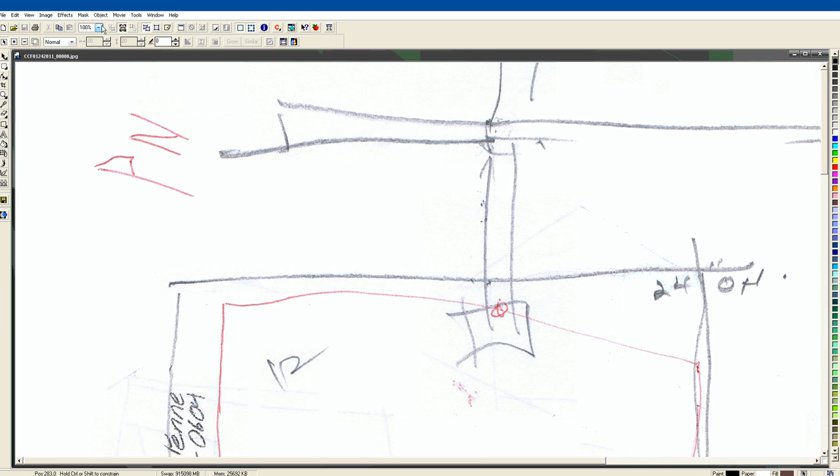I'm just going to use Corel Draw here to do this. Let's get up, we'll bring in the first scan here. There's a lot of scratch, hopefully you can see, you'll have to follow my mouse here as I talk. This is his basic drawing.

It's a rectangle. He's given me some sizes, he wants 58 feet that way and 28 and a half feet that way. This, not necessarily the front of the house, but over here is the road. It's in a large field. He has a really nice view going in this direction, if you can see my mouse.

On this house he's going to attach a deck, and the deck is going to wrap around. His front door is over here, his driveway will come in through here. He's going to put this squiggly line in here as a retaining wall, and then we're going to build him a shop over in this area here. This gives us our basic layout. The scratch is just stuff that we talked about as we were working through this drawing.

Okay, let's bring in another one. Let's go to fit. This is a scratch drawing just so that I knew what was going on. This is his basement, underneath the main floor of the house, so concrete.

He's going to walk out the back of it again into this large open field with the view, so he wants glass doors to walk out of. This BM is just a beam we're going to put right down the center. Floor joists are going to run from either side, and then we've just sort of done a little layout showing he'll probably have a bedroom over here and a bedroom over here.

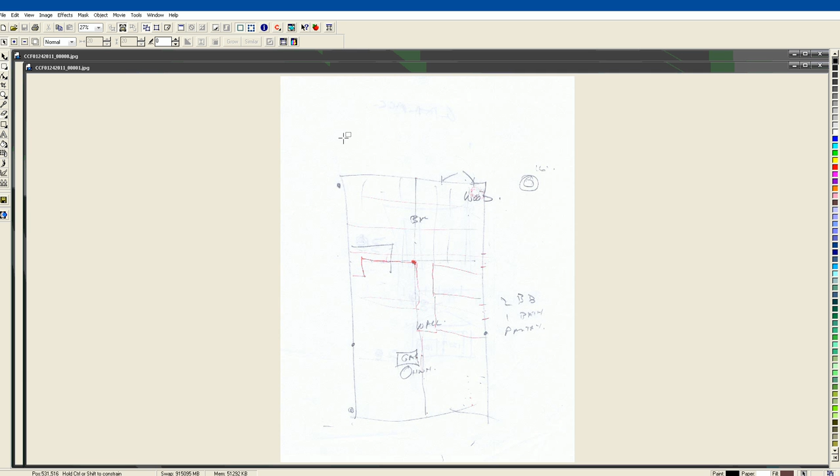Okay, we'll bring in another one. So you'll have these files, you can print them out, I use them all over the place. This one needs to be rotated a little bit. So image, where's rotate? Here's rotate, and I want to go counterclockwise.

So this is just a sketch sort of showing his elevations. His land is very sloped. So we talked about the road being at, well, the front of the house, the north end of the house. This would be the road, so there's a hill coming down onto the road.

And what he's worried about, his land slopes continuously down from the road. And he's worried about water running down across the road and then coming down into his basement. And so we're going to give him 10-foot high walls here, and he's going to backfill so he's got some slope going from 8 inches below the top of his concrete back to the road.

And then we're going to step the basement, so that he can walk out down at this level. Now we get to dictate on the plan how he's going to backfill all of this. As you can see, there's going to be lots of backfill. So this is just a sketch.

This was another way of getting a 9-foot high or a 10-foot high basement, was to use 8 feet of concrete and then build a wall on top. But he doesn't believe that he's going to be able to get slope from this point back to the road. So we're going to do this all in concrete, and that's beyond us in the BC Building Code.

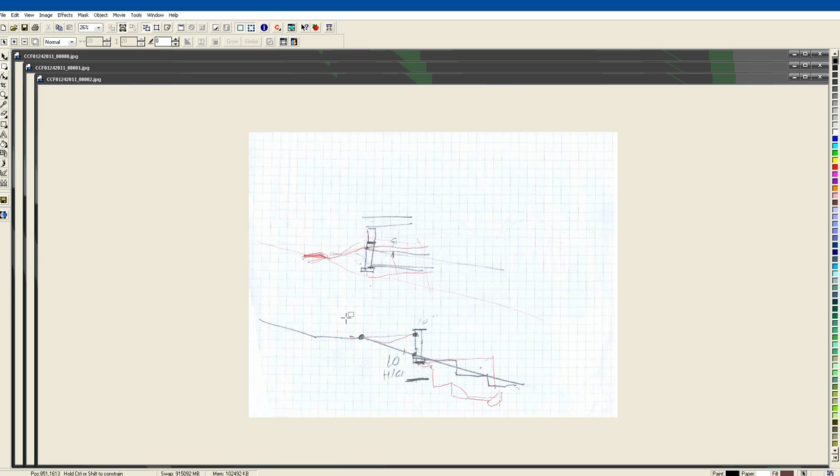What he's going to have to do is take our plans to an engineer and have this 10-foot high wall, with backfill up to 8 inches from the top of it, engineered. The engineer will tell him how thick that wall has to be, how much rebar it has to be, and so on. So we've already pretty much established that as we were talking.

Okay, so another drawing.

Again, this one needs to be rotated, but let's go ahead and do it. Rotate 90 degrees counterclockwise. Okay, this just basically shows the back of the house.

So here he's got his foundation. This squiggly line would be the ground. He wants lots of windows.

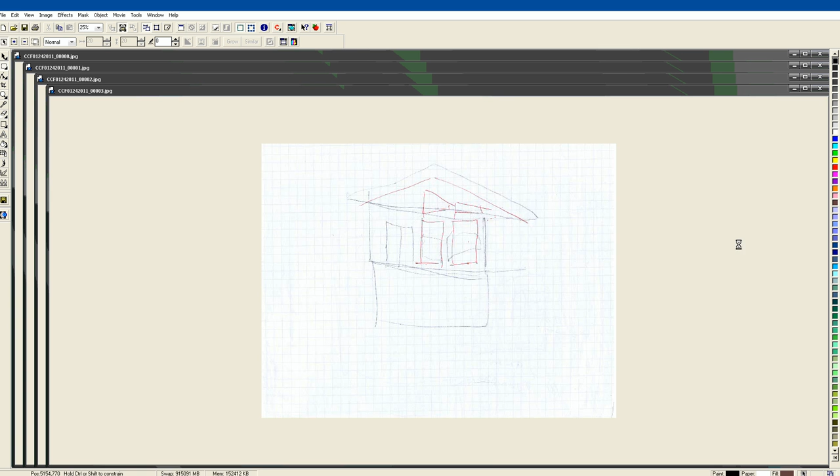He wants a ceiling in the back end of this house that matches the pitch of the roof so that he can get these rake windows up on top. And then here he wants a double door onto a deck. So that's all that was about, just to jog my memory what the back of the house wants to be.

So this one, okay, this is a squiggly layout. This would be his house. This would be the wraparound deck. Now we're going to build him a shop over here.

And we're going to put a breezeway, a roof, so that he can walk from his house, from that door, the side door, the front door if you will, over to his shop, and he won't have to shovel snow because it'll have a roof over it.

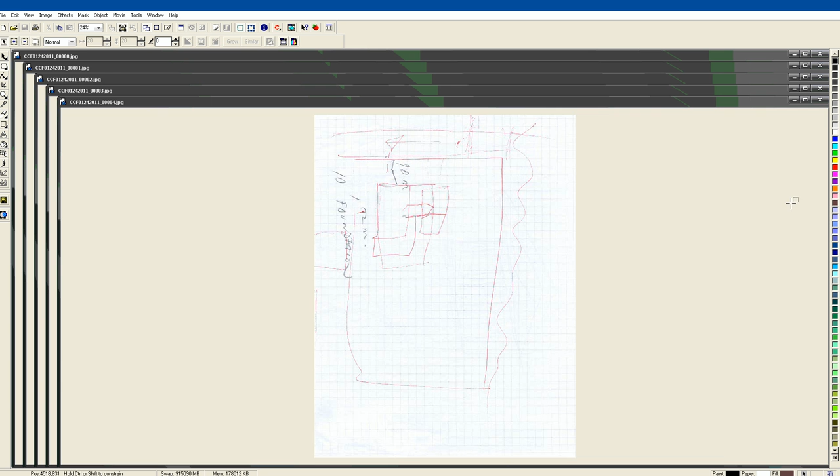Okay, this one, to fit. Again, needs to be rotated, but it's just another graphic for me. This would be his shop.

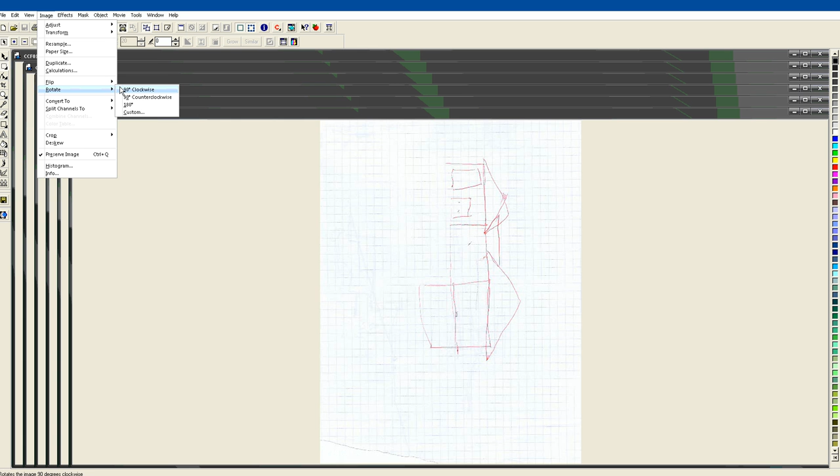Here, let's rotate this so it'll make it a little bit clearer for you. Rotate. Okay, so this would be his shop over in this direction. This would be his house. The roof of the house is going to cover this deck completely.

So there's some information off this drawing. It also shows that he wants a large garage door in this, and a small one. One's for his wife's car, and the other is to get his boat into this space. And again, the roof between the two.

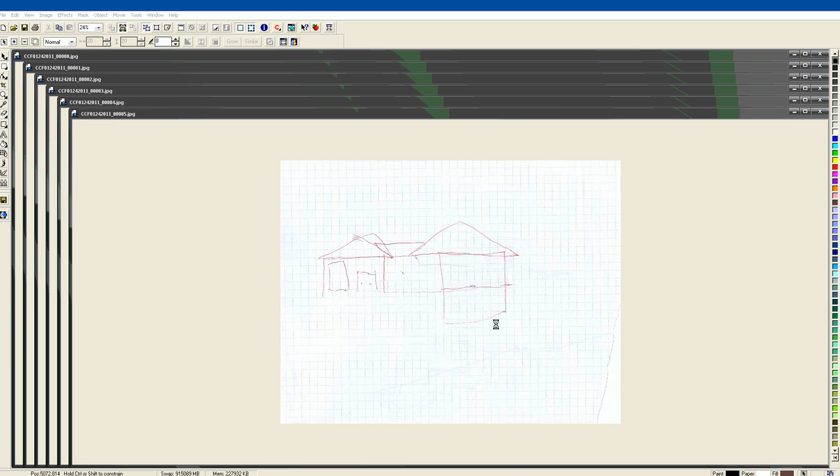Okay, so let's bring in the last one here to fit. I don't even remember what this is. Oh, this is the shop. Let's turn it around completely. To fit, I need to rotate it.

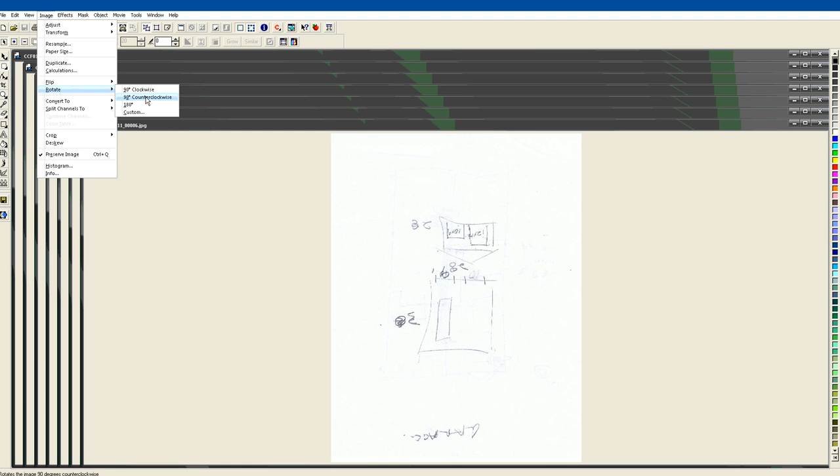Rotate. Well, let's do one of those and then do another one. Okay, so this is sort of the layout of the garage. It's going to be 30 feet long, 28 feet wide.

The door here is going to be 10 by 9 high, and this door is going to be 12 by 12. Okay, so there's some information that the roof will match the roof of the house, and of course there'll be a breezeway. So these can be printed out, they'll be a lot clearer for you when they're printed out.

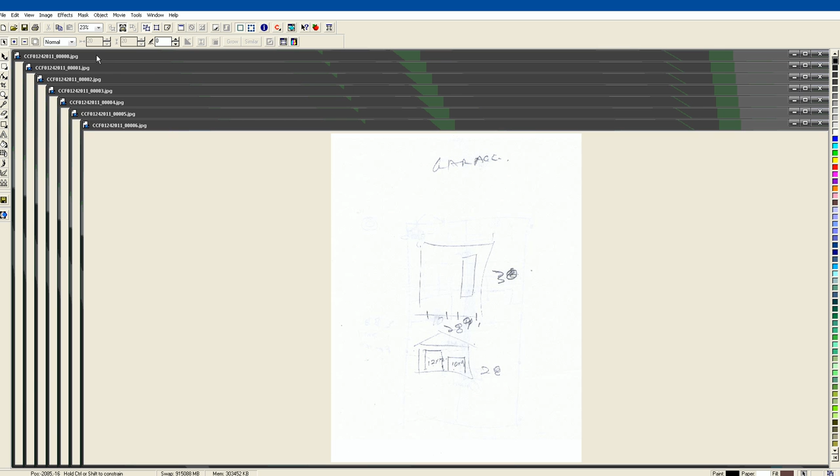But anyway, that's pretty much what we're going to work with here. If we go back to his floor plan that we're going to start with, let's go to 100% here so that we can scroll around.

Okay, so that's a lot clearer for you. This is what we're going to work off of. Okay, we get to play with it.

Okay, he doesn't know how wide this bedroom's supposed to be. He has a hallway. He has a main bathroom. We know that's going to be 5 feet because that's a tub, toilet, vanity.

This ensuite area needs to be fairly luxurious. You can see he's got a big 5 or 6 foot corner tub in there. He wants a walk-in closet, so that's going to take up a lot of room.

He has another little bedroom, bedroom number 2, okay, here. Then he's got this pantry set up, closet for this bedroom. He needs an office with a corner, double glass doors he wants in there.

Okay, this stair, we'll figure out his stairs. He wants the stairs 42 inches wide. That was very important. You can see this is his main door for coming in.

And he'll have steps that come up to this door, not very many, because he's going to backfill up to there, but then he's going to put in a retaining wall here, and he's just going to drop the elevation, his finished elevation, down steeply so that he can get windows underneath these windows downstairs.

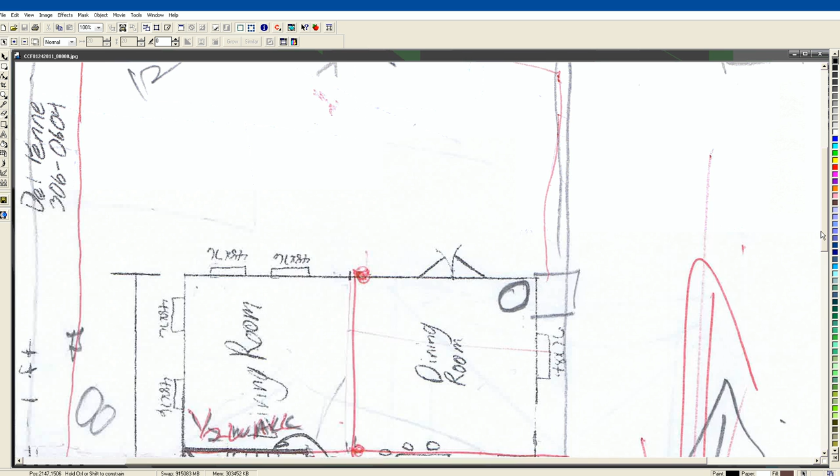Okay, here we've shown a good sized 12-foot deck that he wants out of here. We'll have to have a big post sitting here with a beam running across, and again rafters.

And this red line here sort of designates, okay, he's going to have posts all along here, so that this roof will extend all right over here, covering this whole area, not just the house, so that everything is under a roof.

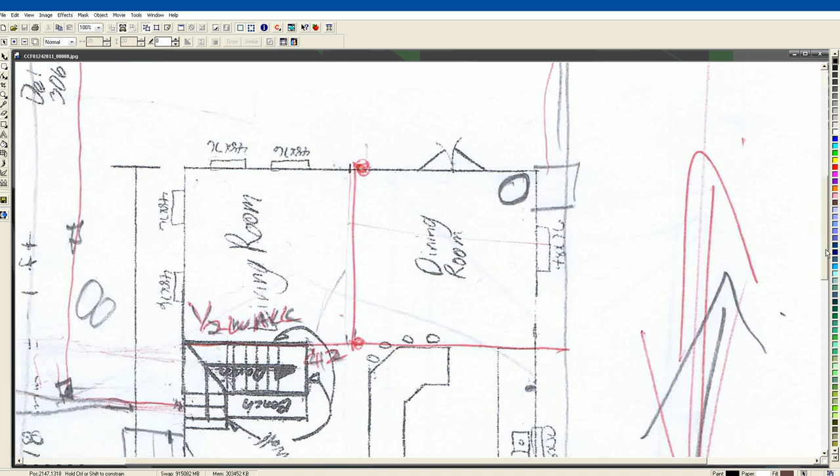Okay, so print that out and we'll get started drawing here pretty quick. Okay, get rid of this file, or you should have downloaded a file called tutorial package.

Now there's a backup because I've actually opened up a drawing here. I can delete this, we don't need the backup. AutoCAD will make backups wherever you open the drawing from.

Okay, there's a basic drawing. This is what we start with. It has all sorts of things attached to it - these are Lisp routines we're going to use to make bifolds and doors when doing the plan, it's a lot quicker. There's a window list I may or may not use, but these three need to be in this basic drawing so we can use them. This basic blocks file we're going to keep separate, and I'm going to use the AutoCAD Explorer to find all these blocks I need.

Okay, the basic backup, we can just delete that for now. The README text has instructions on how to load these various things as you download it. And I'm missing a font in here - I don't know what happened, but we'll find it and load that as well.

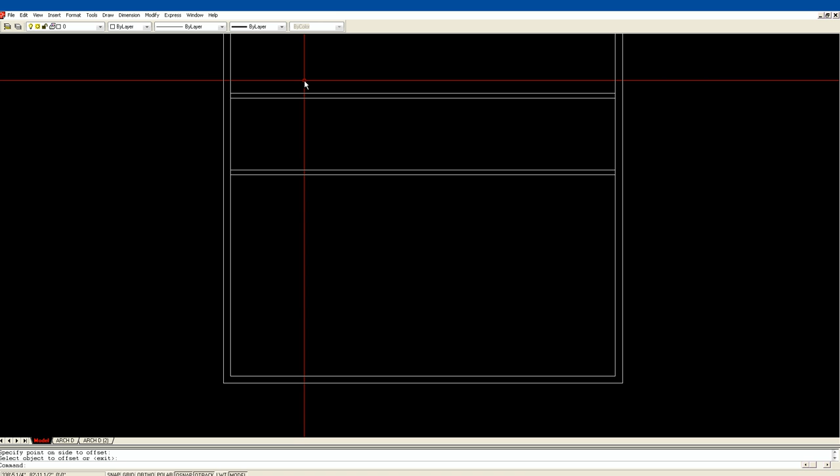A 3.5 inch wood stud and a 1/2 inch drywall makes 4 inches, and that's what we design with. The framer who builds this house has to understand that when we've left 5 feet, that's actually wood to wood, because the drywall goes in later. So the finished width of that bathroom will be 5 feet minus 1/2 inch on either side for drywall, so actually 1 inch less. These are just industry standards.

Same with the exterior walls. We said we were using 2x6, which is actually 1.5 inches by 5.5. We're using 3/8 plywood on the outside of the house, so the walls really are 6 inches. But when the framer frames it, he goes to an outside dimension, and that's all we give. So in actual fact, the house will be 1/2 inch narrower on either side, because we haven't accounted for the drywall. If you calculate everything, you'll say our walls aren't 4 inches, walls aren't 6 inches - well, they are for designing purposes. You just have to keep in mind that the trades know what they're doing and account for the discrepancies.

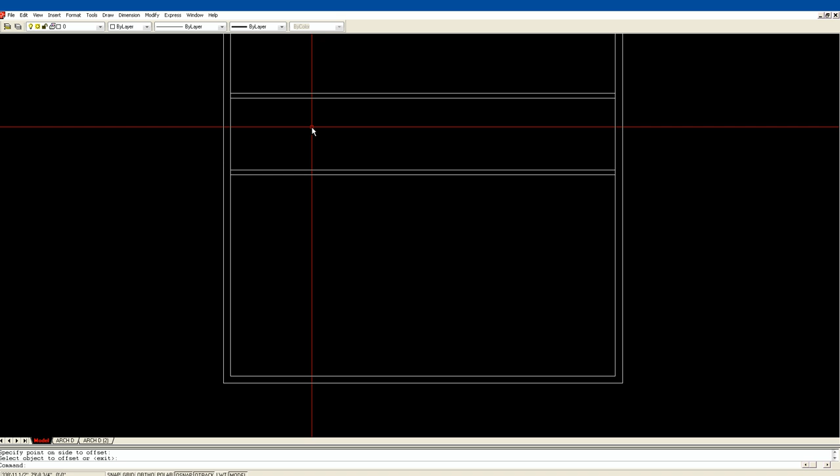And we have to be careful - again, this 5 feet, and then 4 inches on either side. We just know that's the way it works. Enough for that, let's go on to the next area, which is an office.

If I look down at his drawing and I left 14 feet for the master bedroom, the office is a little smaller. Let's leave 12 feet for now - that'll be a beautiful sized office or bedroom. So we're going to offset 12 feet, and then we're going to go 4 inches.

So we zoom down a bit, and you just have to use your eye. I have maybe a little less than half the building left, and if I look down at his drawing, I'm pretty proportional - I didn't do a bad job at the guesstimate, so for now I'm going to leave it. The beauty of working in AutoCAD is that we can change things, move things, stretch things. This is just a good way to start.

Okay, now we get to this front entrance, and there's a couple things with the way he's drawn it. I don't see a closet. He's got L-shaped stairs and a bench, where he's calling up a bench inside.

We can take some room out of that office if we want to put a closet in, and we can talk to him afterwards - this is a preliminary drawing. Already we've noted that there's no closet space. We can mention that to the owner, or we can go ahead and draw one in later if we think we have enough room.

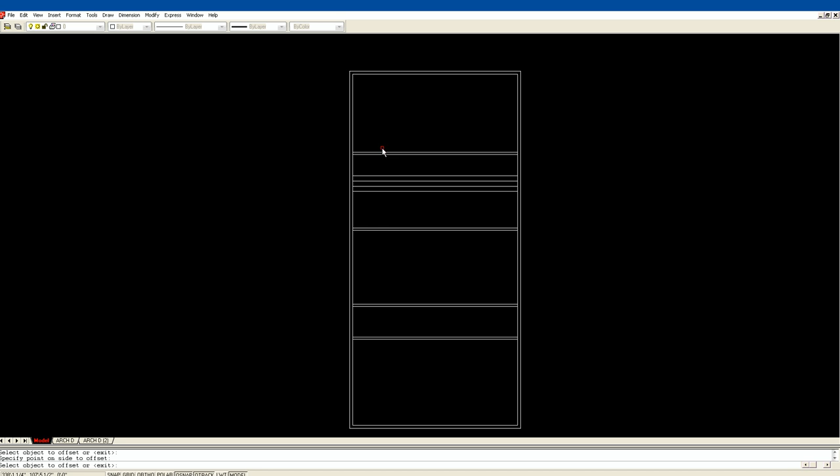Now he's told us he wants his stairs 42 inches wide, so this next landing we're going to draw here will be 42. We'll offset 42 - okay, so that's actually the wall. That's actually the outside edge of our steps, so we'll offset 4 inches. Now, he has told me he doesn't want a railing, he wants a half wall at that point, so that people don't fall down this stairwell. That's fine, we'll do that.

Offset 42 in this direction. Okay, so that gives us a lot of information there. If we trim, if we clean this up, that's the width of these stairs going down. So there they are, 1, 2, 3, 4 risers down, a 42-inch landing in both directions. Now we can trim here too, make that a little nicer.

Now we can start going down the other direction. So offset 10. I'm not counting here, so 1, 2, 3, 4, 5, 6, 7, 8, 9, 10, 11, 12, 13, 14, 15. Okay, it's getting to be, you know, 15, 16, 17.

And I don't like this, when they put, what they do is they build this landing and then divide it in half diagonally and have a step, and I don't think it's very comfortable, but he doesn't seem to mind it, so we'll do that. So now we've got 1, 2, 3, 4, and then 5, 6, 7, 8, 9, 10, 11, 12, 13, 14, 15, 16, 17, 18. Okay, that's good.

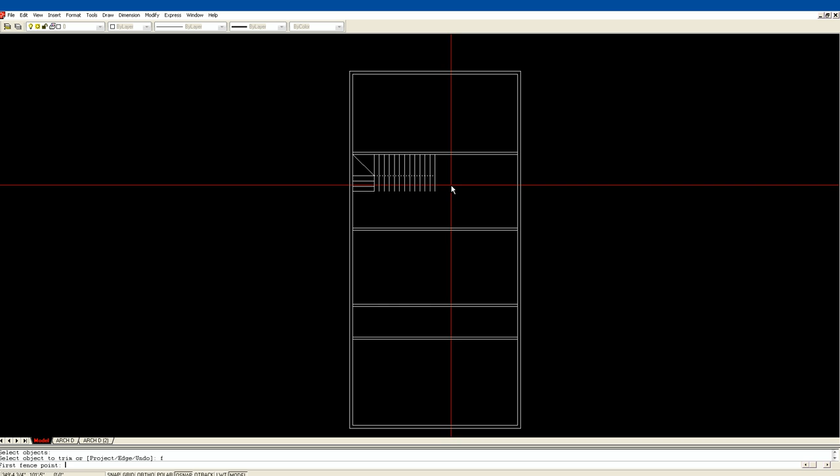We'll draw a line from - oh, I have OTRACK on, I'll just turn OTRACK off. I want to draw a line from there to parallel over, and then I just want to trim. I'm going to use a fence, F for fence, and go across to there and get rid of those. Now if I zoom in a little bit, okay, there's sort of the layout.

Now at this point, there's only going to be one way to sort of explain this next. Okay, so that's a half-an-hour tutorial. We'll continue with the stairs in the next tutorial. Thank you.